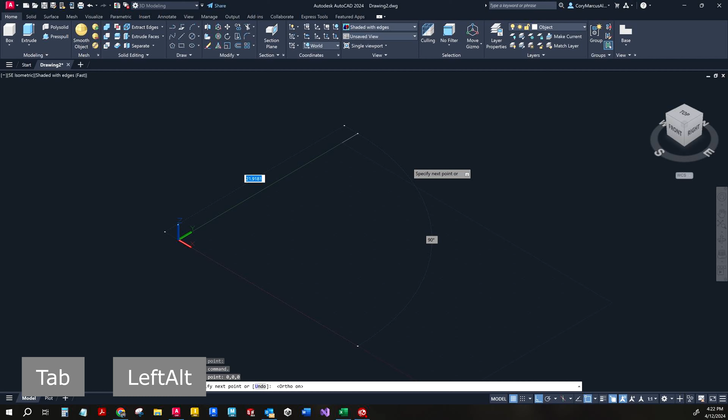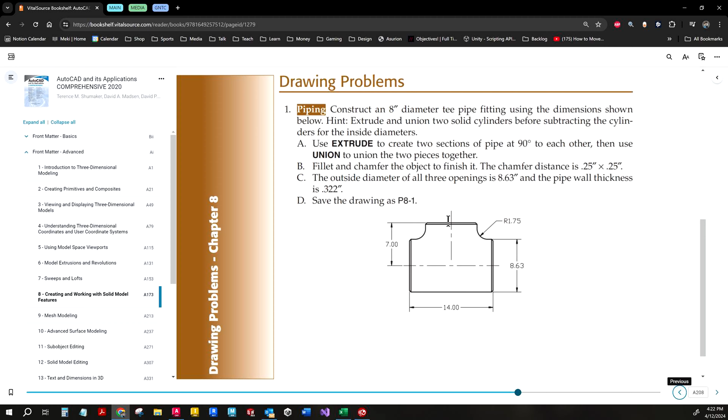I'm going to start just by drawing a line. Now you can do it wherever. I'm going to do it at 0, 0, 0. I'm going to put it on ortho. I'm going to do 14 for the line length. Now we're going to draw the lines that these pass across. So I'll do one from the center point up 7. Or midpoint, I should say.

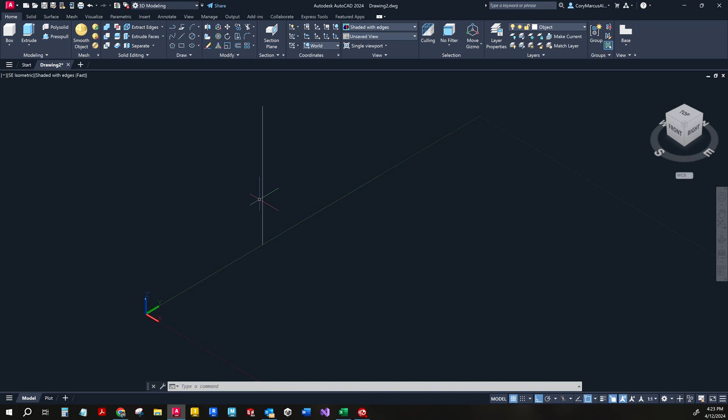Now I'll draw two circles over here at 0, 0, 0, and two circles up here at the top of the 7 line, and then we'll extrude this way and extrude down, and it won't be too bad. We need to switch our UCS, in my case, to be front, and because we did it at 0, 0, 0, we're already in the right spot for drawing. Our first diameter is 8.63.

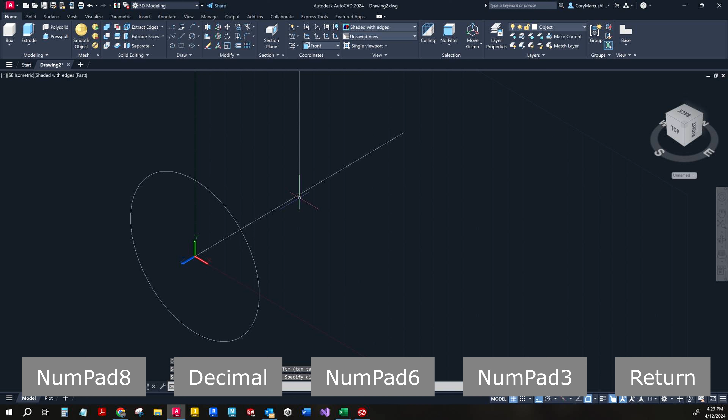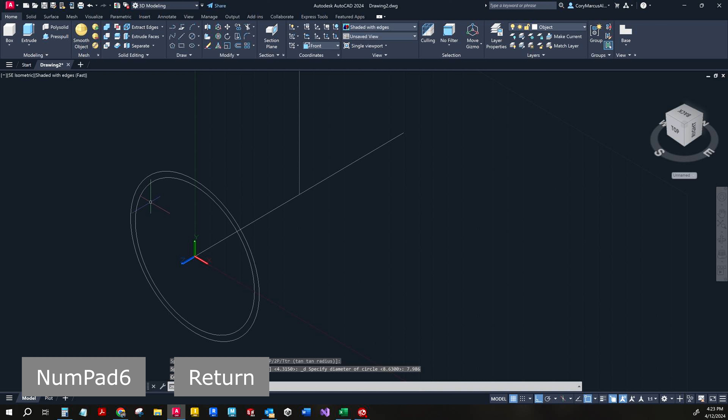I'm going to pull out the calculator real quick. It says the wall thickness is 0.322. So we need to subtract 0.322 twice, and we're left with 7.986. If you're wondering why we did 0.322 twice, it's because to have the difference there, you need to do it on both sides. So if I measure on the annotate tab here,

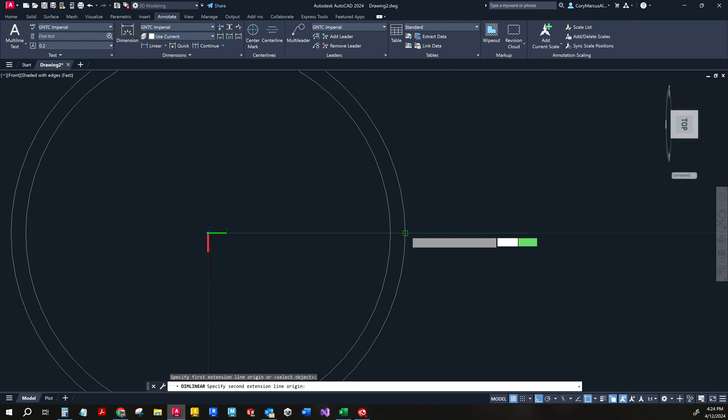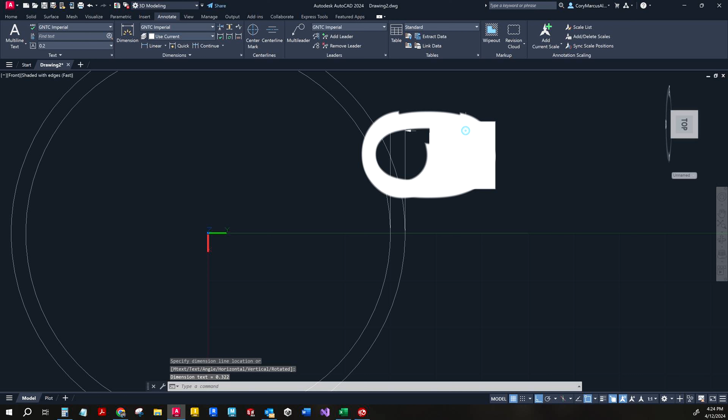and I grab this guy, we get this really strange blown out spot for some reason. Never seen it do that, but you did see for a second, hopefully, that it's 0.322. It's weird, when I clicked it, it goes giant. My font's clearly a little too large, but you get the point. You pretty much have to do that by design to make sure you have the right shape. So we'll do the same thing going on the top UCS.

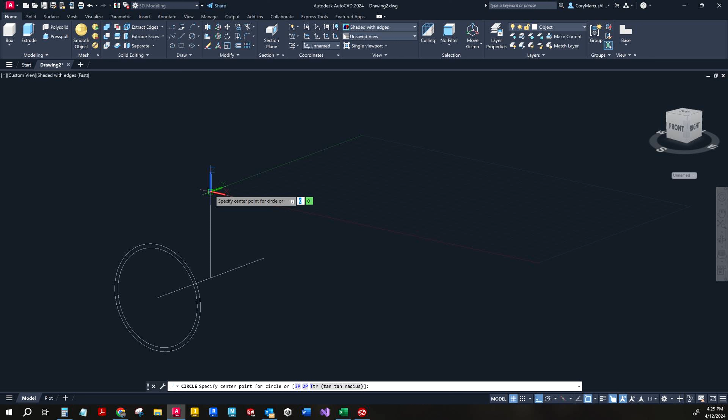We'll grab our gizmo, if I can get a hold of it. Snap it up here. Bam. We'll do the same thing, with the value of 7.986 and 8.63. Okay. From here, we've done all the hard work. We're just going to do a couple of features.

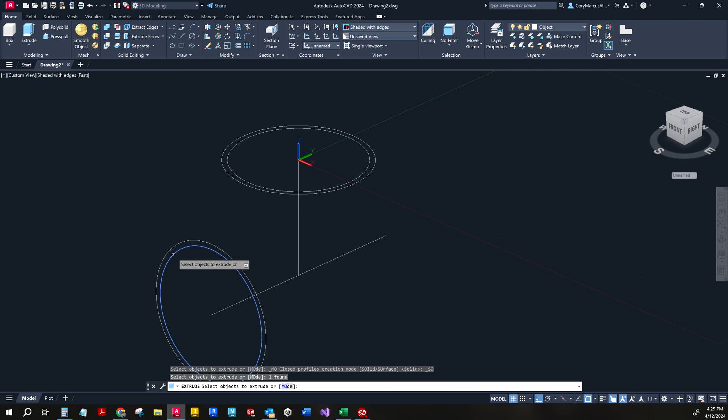So we'll do an extrude, and we're going to choose both bodies. This will create two solid objects, which we want in this case. I'll hit enter, and if you can see my snap point, it's the end of that line we drew. It becomes hard to see to do the other one, so we're going to do a section plane. Notice I'm hovering on the cylindrical body, and choosing the points on it. It's still finicky, if we're being honest.

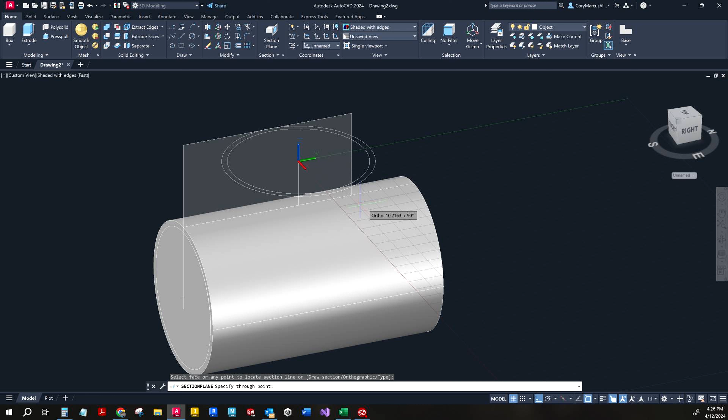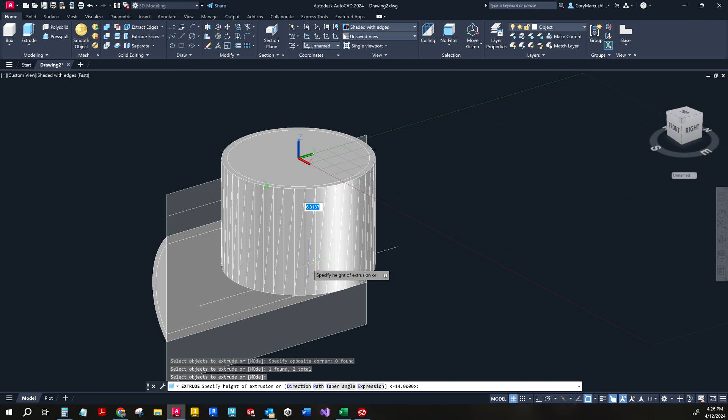So let's try that again. There we go. Sometimes the same selection doesn't necessarily work, so I'm going to grab it and pull it back a little so we can see. Now we're going to do these two circles extruding down. We'll go to the end of the line. Now I can just delete my section plane. And so now we have two separate bodies on each side.

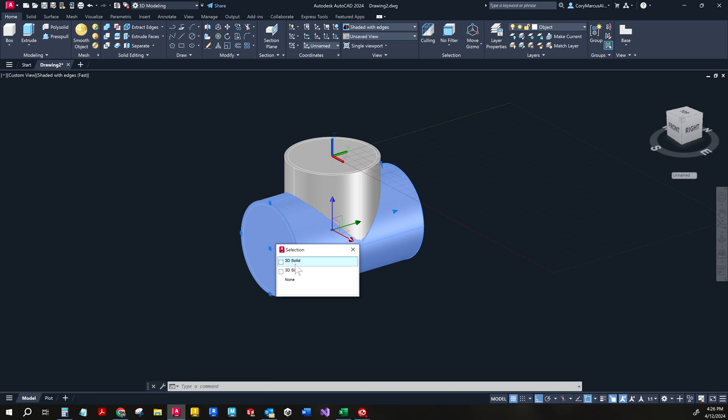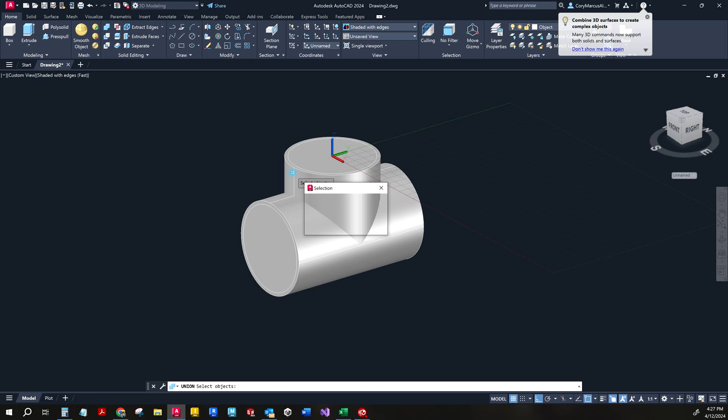We're going to join the outside two and the inside two separately, and then subtract them from each other. So first we will click the inside one and the other. We'll do a join. Oh, you know what? Order of operations. So hit join, choose the inside. Unfortunately, it did grab the outside, so we're going to shift click, and once you've got both, enter. Now it's one body, and I'll do the same thing for the other side. Outside to outside.

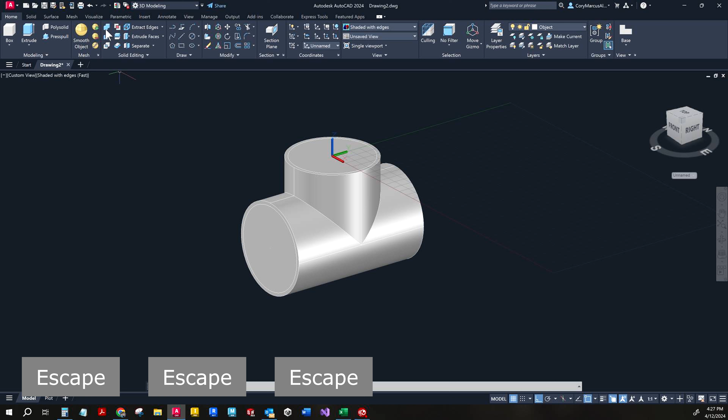Now we've got two separate full bodies, and to subtract, we'll first choose the outside body. Then, order of operations here, choose the outside. Choose the inside after right clicking or hitting enter. I'm going to hit enter again. And there we go. We have subtracted the two bodies. We can see through it. Not too bad.

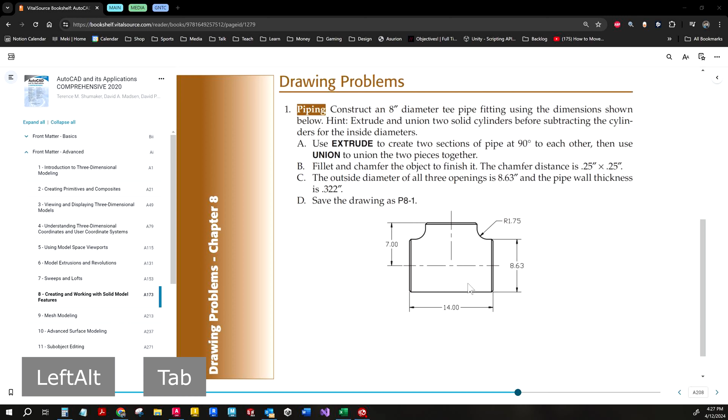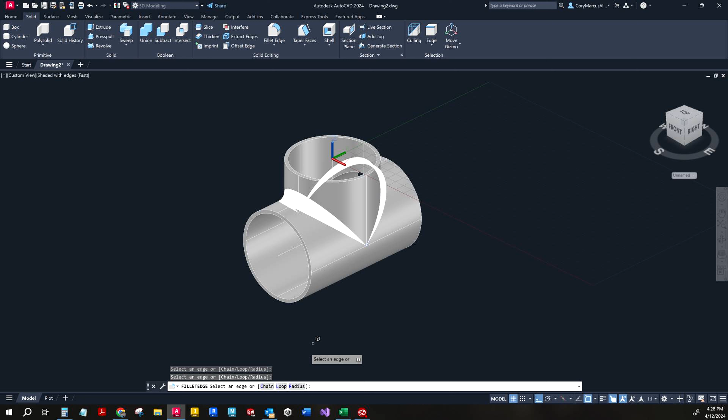From here, we just need to do our chamfer of 0.25 on each of the three edges, and then our fillet of 1.75. We'll do the fillet first. I'm going to grab the edge and the other edge, choose radius down here, type in 1.75, hit enter again, and enter one more time. All right, and then we just need our chamfer.

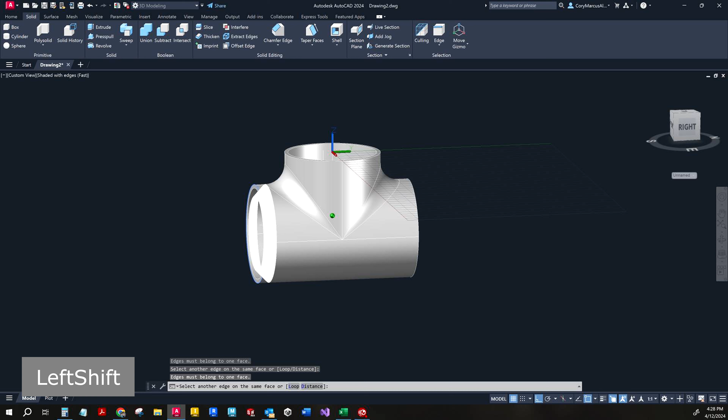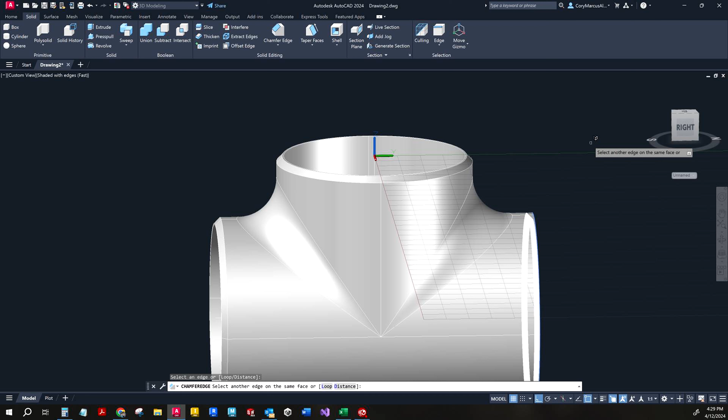I'm going to choose the edge. It looks like you can't do multiple edges at once. That's okay. We'll choose our distance, 0.25. Our other one is 0.25. And we can see a lovely preview. So we'll hit enter, enter. Choose it again. Choose the next one. It retains the settings, so we don't have to do all that again. We can just hit enter a few times. Same thing, chamfer the edge, hit enter, enter, and we're good.

You don't have to do anything to the inside. That's pretty much it.